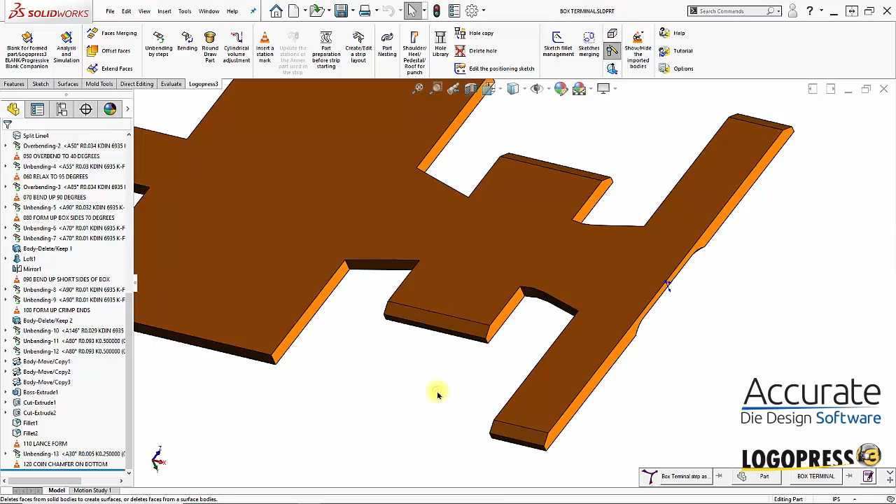In the previous video, we inserted the station mark for these coined areas on the bottom of the part. Station 130 does not have them, so I'll use SOLIDWORKS Delete Face to delete these 4 coined areas. And then I'll insert a station mark for the coining of these 3 wire grippers.

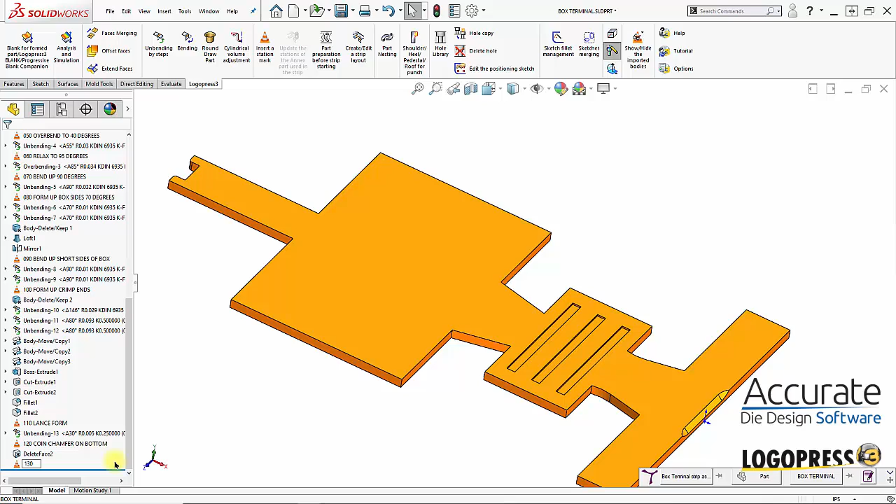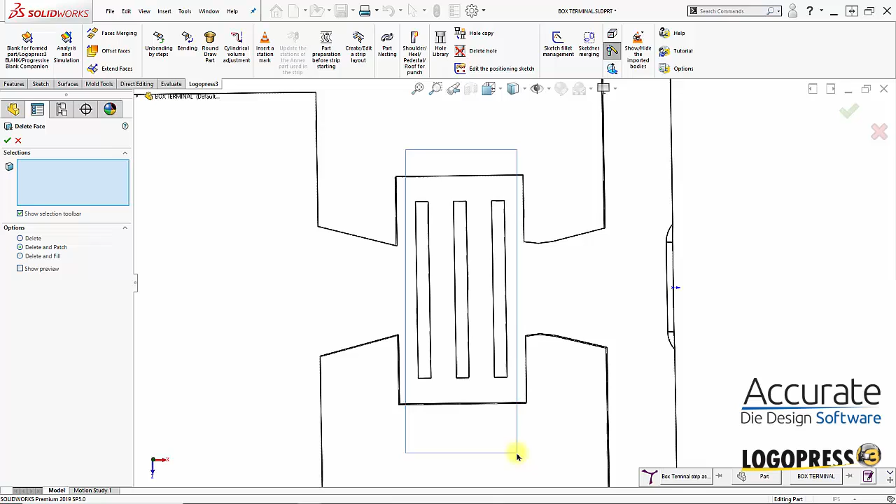Station 140 does not have those, so I'm going to change the display style to hidden lines visible, and use Delete Face to delete these. With hidden lines visible, I can select through and get all the hidden faces.

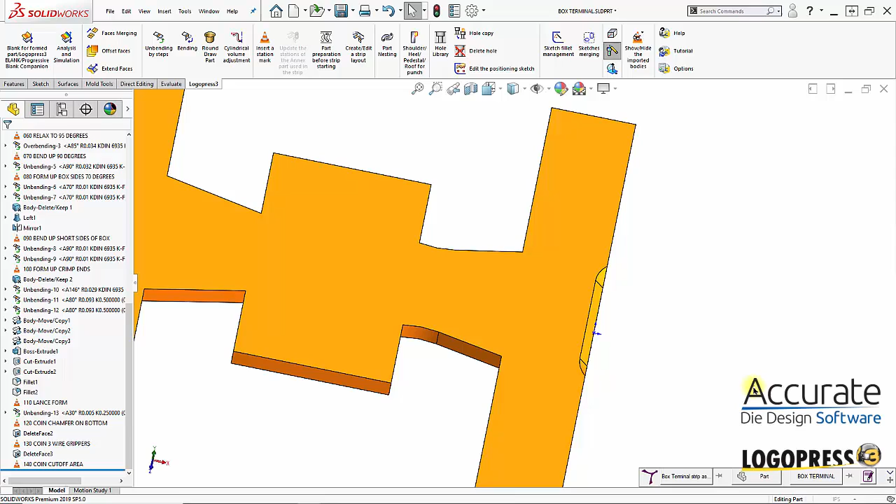Insert another station mark, and this will be 140, where we're coining that end cutoff area. Now I can remove that. Again, use Delete Face to do that. Select those 3 faces, then they're gone. And now the part is completely flat, no coins on it, front or back.

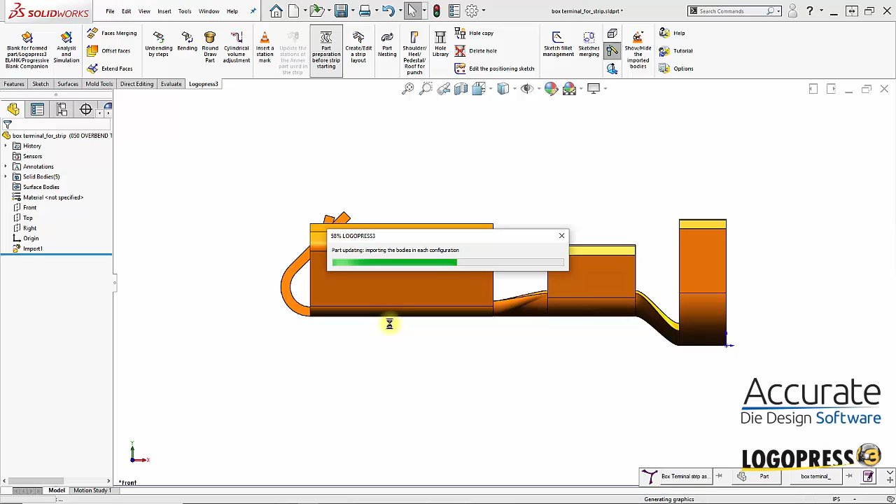And insert our last station mark, which is always for the flat blank. I'll save the part. And the next thing I have to do is part preparation before strip starting. And yes, I want to rebuild the reference part. That will make sure that our body files from the station marks are up to date. And it just created the annex part. This is the part that we'll actually see in the strip assembly.

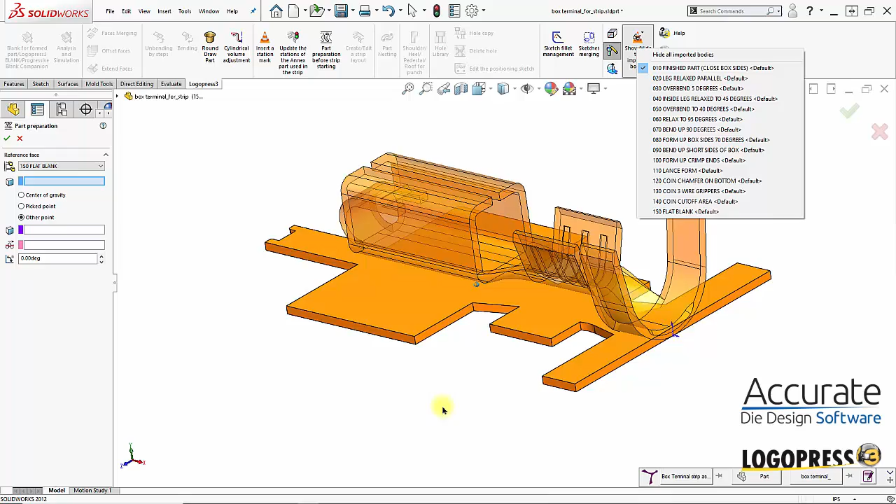And we're in part preparation. The first thing it asks for is what face is at die level. Well, I will overlay the finished part on top of it. So, okay, bottom of it, die level is here. So I can select that. And then I'll hide the imported bodies, and then I can select my origin point.

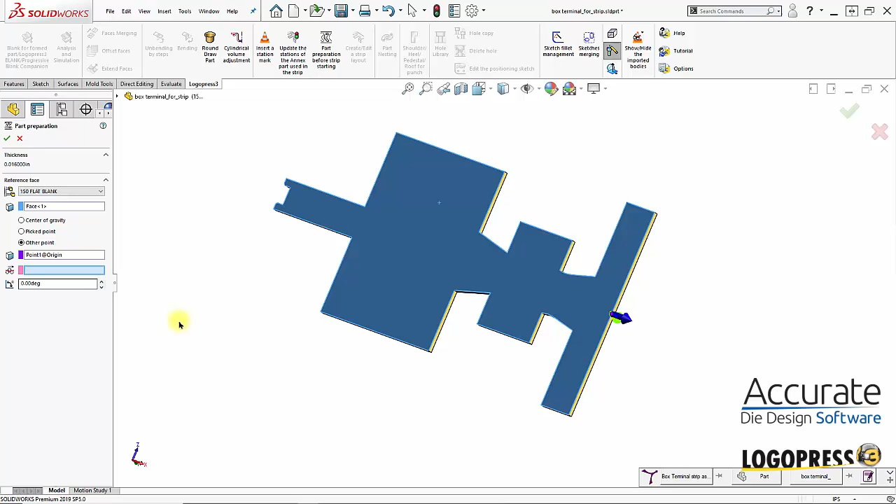The nice thing is that the origin doesn't have to be anywhere on the part, or the actual SOLIDWORKS origin doesn't have to be anywhere near the part. We can tell it to use something else. And my feed direction. And I'll select OK. And it will create a strip starting folder, and one of the things in that strip starting folder is this blank sketch and some other things to help locate the part in the strip assembly.

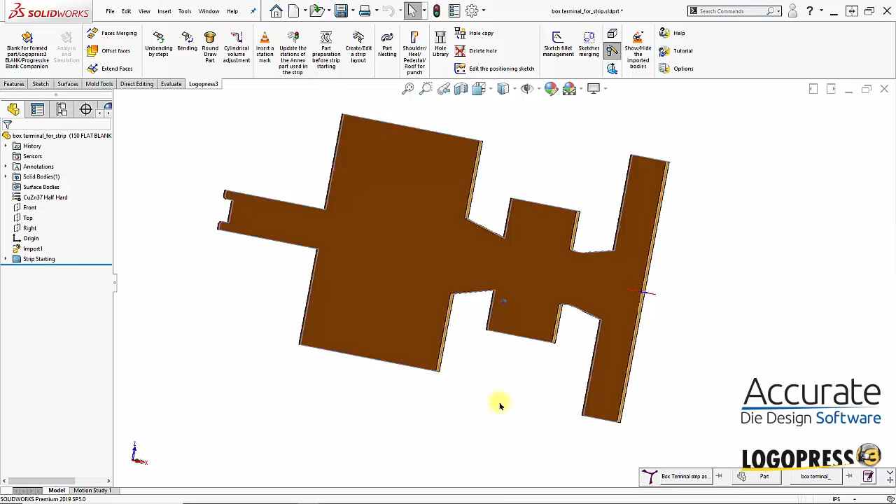And let's say I'm looking at this part and I notice that it has a lot of sharp corners here. I'd like to add some fillets to this blank before we create the strip, or even after we create the strip. So I need to do that in the reference part, the part with station marks. So I'll go back to that part. And then I just have to roll the history bar up above the flat blank station mark, and I will start adding some fillets.

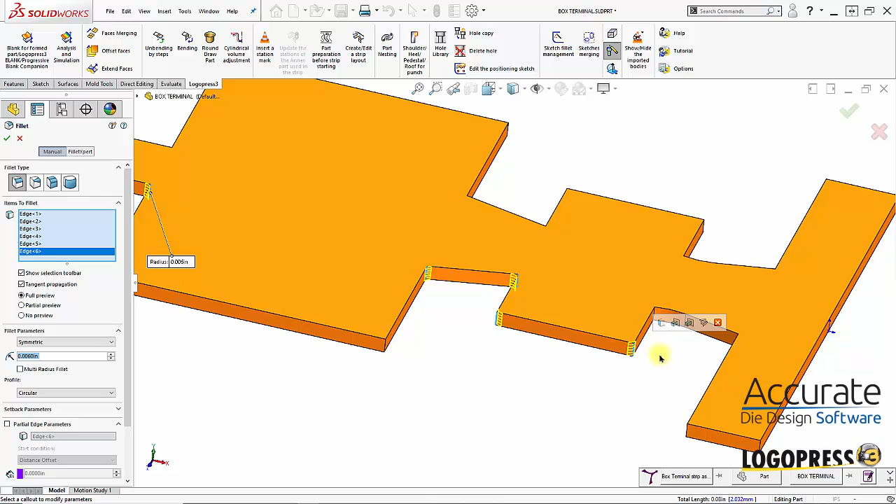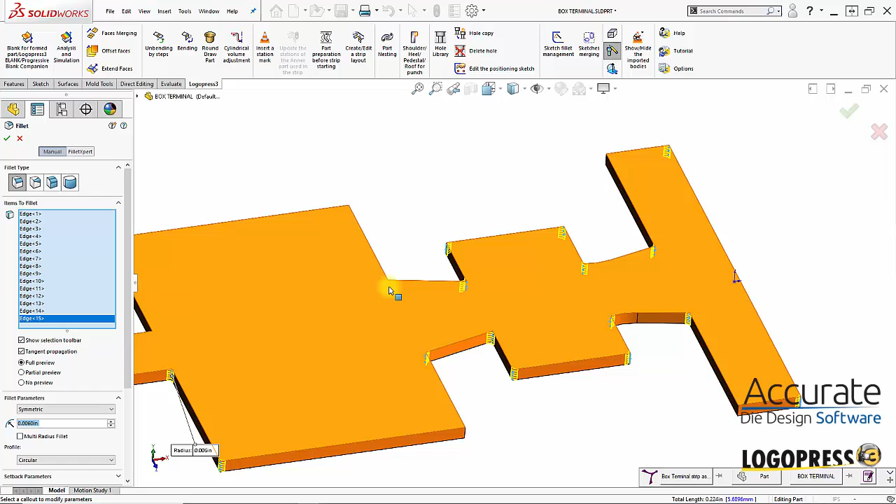And I'll leave some of the corners sharp because of where I plan to bypass punches, which would leave a sharp corner. So not all the sharp corners will have fillets. And I'm looking at this, and yeah, it looks like I got all the ones I want fillets on.

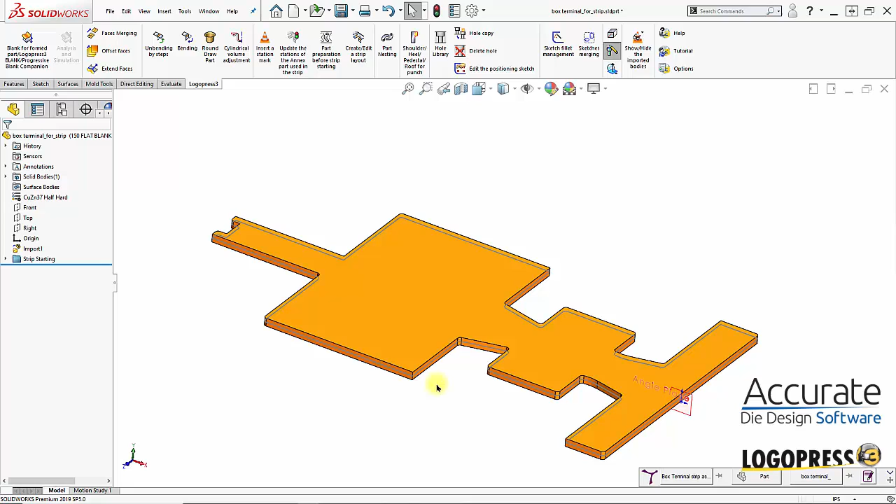Then I'll roll to the end, rebuild, make sure all my body files are up to date, save the reference part, go back to the annex part, and then I will just select update the stations of the annex part. And it's re-importing all those body files. This is done for performance reasons so that this part, which is in the strip, only has imported body files. Very fast and easy to update.

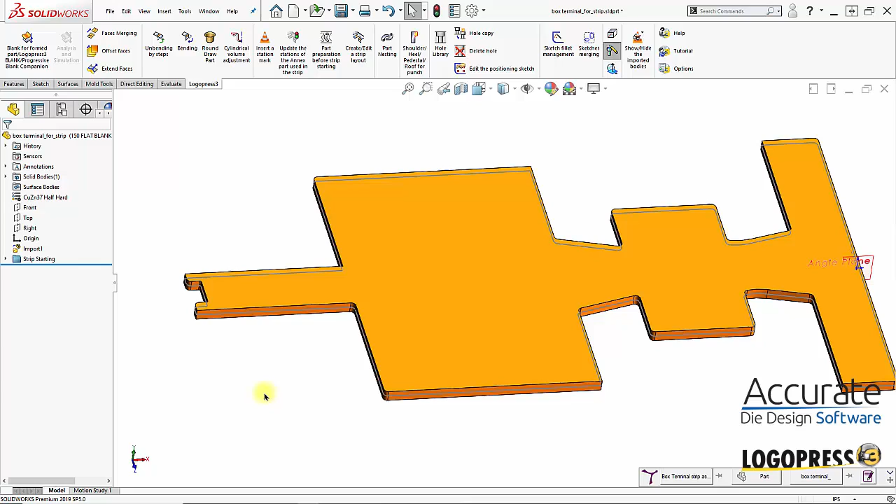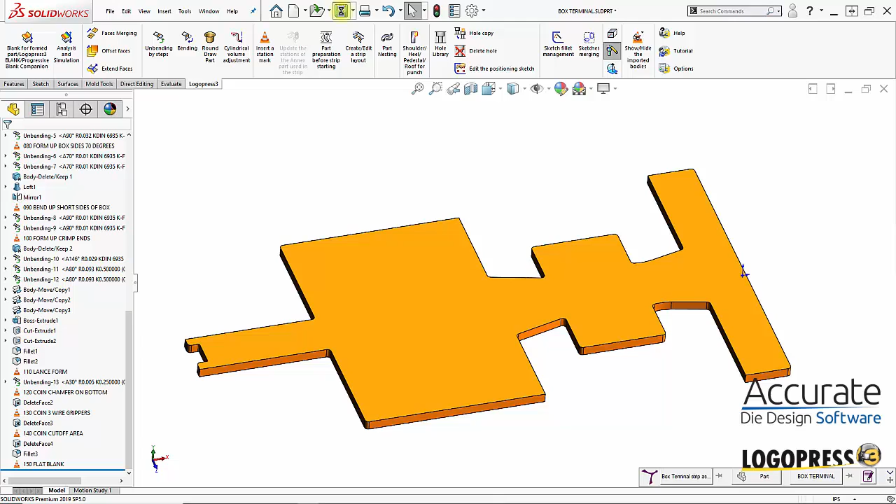And you can see, oh, looks like I missed one fillet there. Easy enough to go back. Edit that fillet feature. There we go. Save the part, go back again, and rebuild or update the stations again.

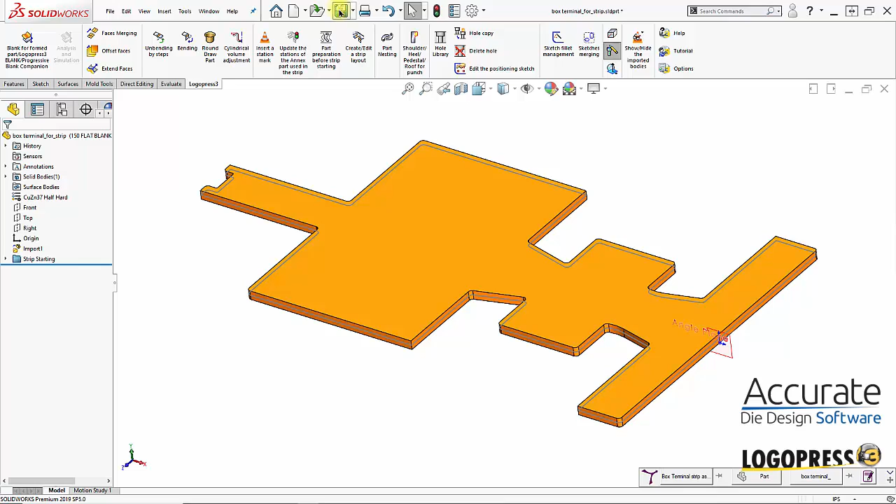And now you can see I got a fillet there and the blank sketch updated. And I'll save this part. And that is the end of this video.